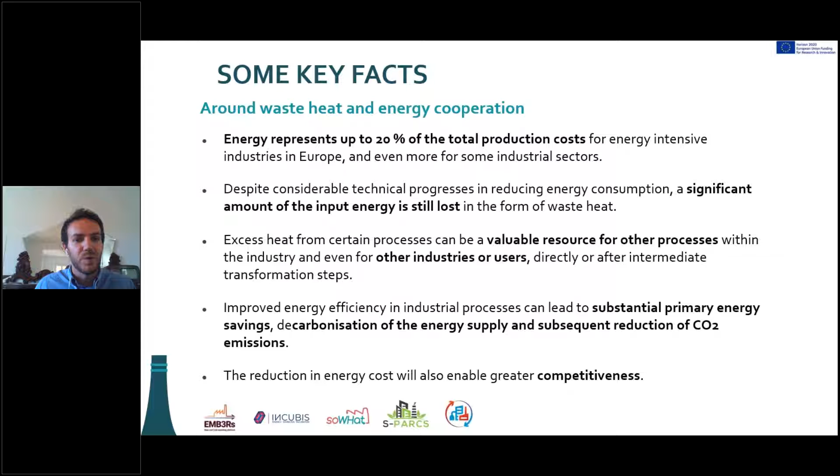And therefore cut our CO2 emissions. And in this sense, not less important, what we can also obtain is to increase our competitiveness in this moment, which is quite difficult for the industry around the world.

That said, I hope you will find this webinar interesting. You will see that these projects, some already started a while ago, some just started, and we are working on collaborating. We hope that you will find everything interesting.

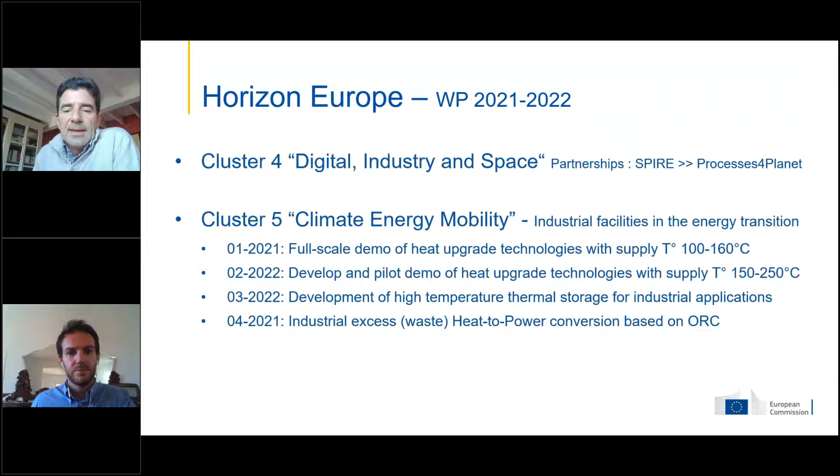Then the last topic is similar to the one we had on Horizon 2020, so heat to power conversion. But as the previous one most probably will rather go to funding supercritical CO2, this time it would rather be based on ORC technology, tackling rather a lower temperature range of waste heat.

All of this contributes to one of the biggest chunks of the energy strategy, which is energy system integration, where we have six priorities. The first one is to go for a more circular energy system, with energy efficiency first principle. That's really where waste heat recovery comes into play.

Circular in that the heat can be recovered within the plant itself, that's always the easiest, but also in industrial clusters to nearby plants or even to local communities for heating buildings in the communities. The second priority is accelerating electrification of energy demand, meaning the heat will be produced not only in the building sector, but also in industry. Again, an impact for you.

Promoting renewable and low carbon fuels, including hydrogen, will reshape industry, energy and feedstocks. And fourth point, making energy markets fit for that. This certainly resonates for you if you address business models, it really fits into the energy markets.

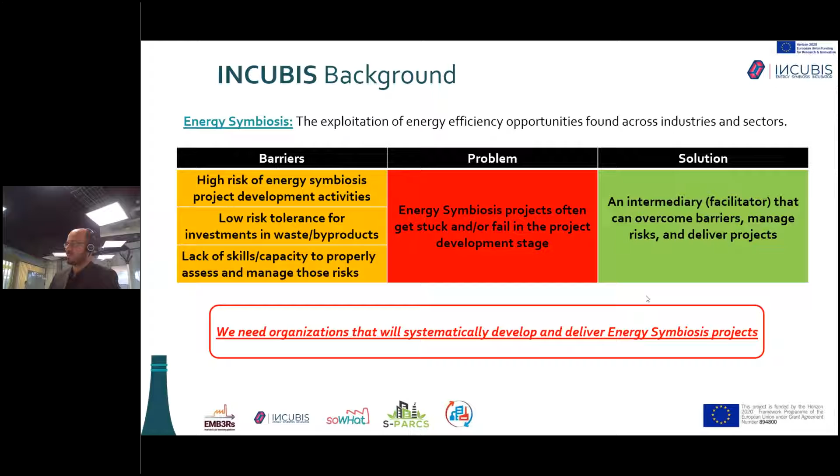The solution is known and it is quite successful. The solution is the existence of an intermediary organization, often called a facilitator, who has the structure and the capacity to overcome these problems and deliver the projects. So the goal or the vision of Incubis is that we have to somehow increase the number of organizations that can actually systematically develop and deliver energy symbiosis projects. And therefore, we follow the incubator model, whereby we're not incubating any type of business, but specifically we are aiming at organizations that can be facilitators.

We are currently developing, and we are going to launch as of May 2021, the Energy Symbiosis Incubator that will provide support to these organizations that can act as energy symbiosis facilitators, with the aim to improve their capacity to deliver energy symbiosis projects. In doing so, we will also set up a virtual platform that will support the delivery of all the tools, services, and methods of the incubator, and will also support the organizations we are helping to deliver energy symbiosis.

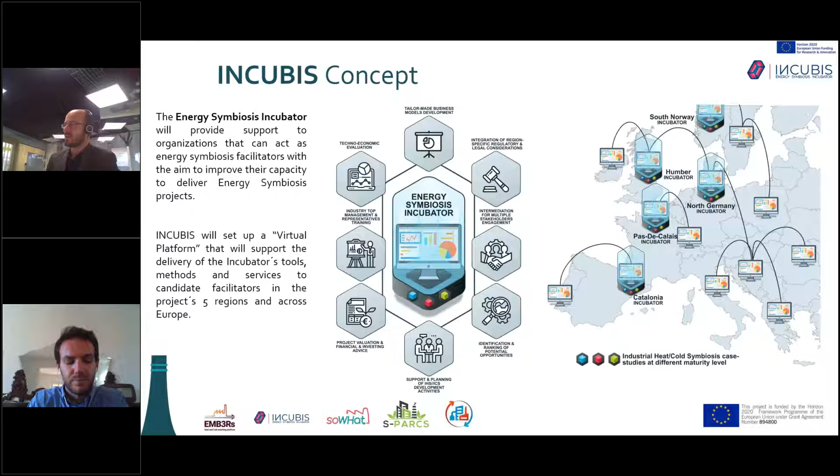You can see here our model. I will not go in detail through all the services, but our model is to launch such incubators in 5 regions across Europe. The regions are Barcelona in Spain, Dunkirk in France, the Hull region in the Humber region of the UK, the Agder region in South Norway, and Brunsbüttel in Germany, in Brunsbüttel city

and industrial park. And the type of services and methods we are delivering here involve techno-economic assessment, business development, implementation frameworks for symbiosis, facilitation methodologies for delivering symbiosis, and of course working across training, policies and impact monitoring for these projects. And you can see in this scheme which partners are responsible for what type of service and tool.

The approach we are taking here is that we are working on case studies that existed before the beginning of the project. We are learning from them, and as of years 2 and 3, we intend to multiply these energy symbiosis projects in the 5 areas of the project, and hopefully by the end of the project work also outside of these areas. For each energy symbiosis project, we are providing support across the life cycle of energy symbiosis, which is the typical life cycle of an energy project involving a preliminary assessment, opportunity identification, feasibility study, and finally delivery and implementation.

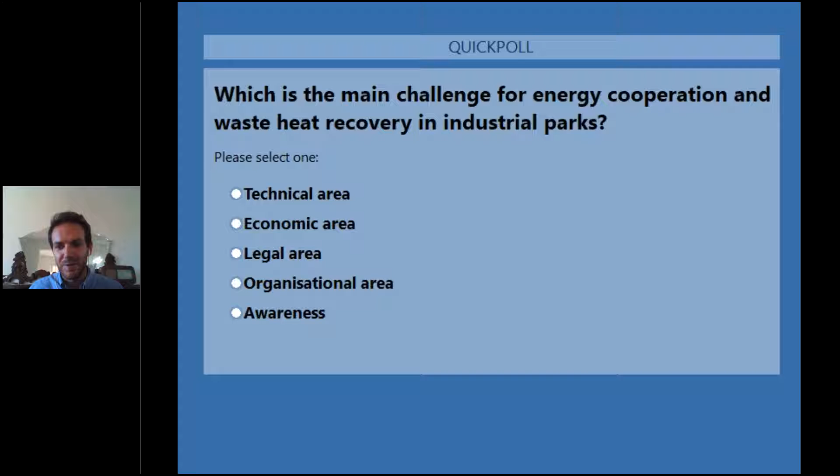Okay, I can anticipate that the main challenges are here. You can see them in the economic and organization areas, not neglecting technical and awareness. Legal is a little bit less stressed.

So Nick, you should be able to share your screen now, and please keep the time. We are a little bit late, nothing crucial. We can see your screen. We cannot hear you, Nick. Can you hear me now? Yes, but we don't see the screen or your camera. Now we see the screen. Can you see one slide full screen? No, we see it in presenter mode. Better now? It's in presenter mode, and we cannot see your webcam. Okay, you should now see my webcam, and now it's full screen. Perfect. Brilliant, sorry about that. I live in Scotland and I'm in the middle of a storm, which seems to be interfering with my connection. I will try and move closer to the router, but please let me know if there are connection issues.

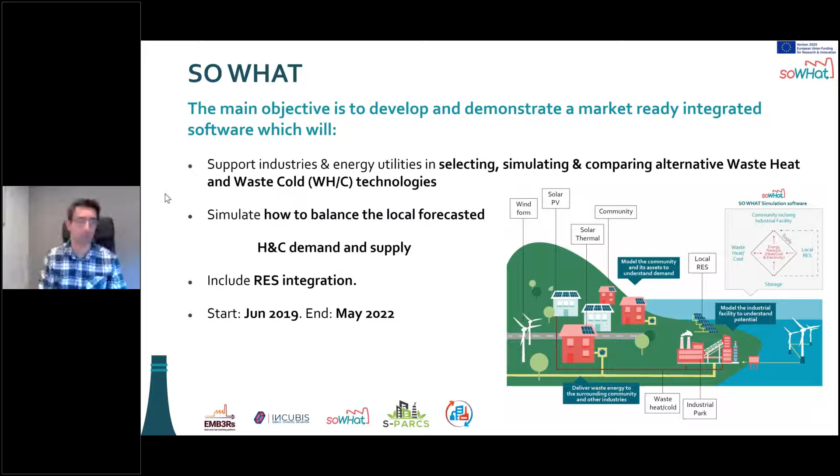Thank you. So the timeline for the project, as I said, is over the next couple of years, and we're currently halfway through the project, and we have done industrial site assessments already. We actually have 11 demo sites that we're going to be using and testing the software on in this project. We've developed a technology database that contains all of the technical and economic parameters concerning different technologies in waste heat and cooling. We've also specified what the software needs to do, both from an end user perspective and from an IT perspective. We're halfway through some business model analysis, and trying to understand how we can integrate energy performance contracting and distributed ledger technologies

into the waste heat and cooling area. Over the next year, we're going to be developing the software and validating it in all of the different industry and demo cases. The final part of the project is to do an analysis of the impact and the lessons learned, and replicate a lot of the things we're doing with the demo sites, hopefully across more industries and communities. I'll just talk briefly through some of the functions that the tool will do. There are three broad areas.

First of all, you've got to baseline the waste heat and cooling as you have it now in your industry or community to try and understand what the potential is for doing this. So the software will have a kind of integrated but minimal data collection associated to it. We'll be able to show lots of different energy flows and what the waste heat and cooling baseline is from an industry perspective. We'll be able to show from a community's perspective what your heat and power supply and demand are, and that is wrapped nicely in a 3D view.

Then we also have on the simulation side of things a lot of different technologies, which I'll move on to in a second, to do with waste heat and cooling, and how you can integrate that with renewable energy technology and balancing the forecasted heat and cooling demand and supply.

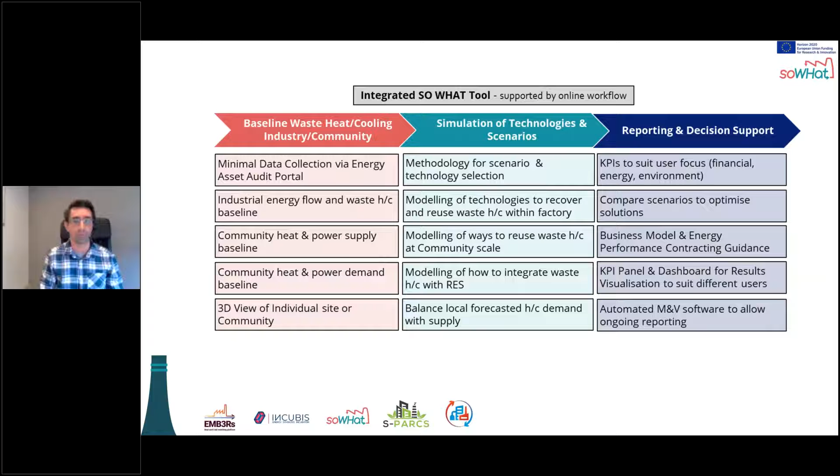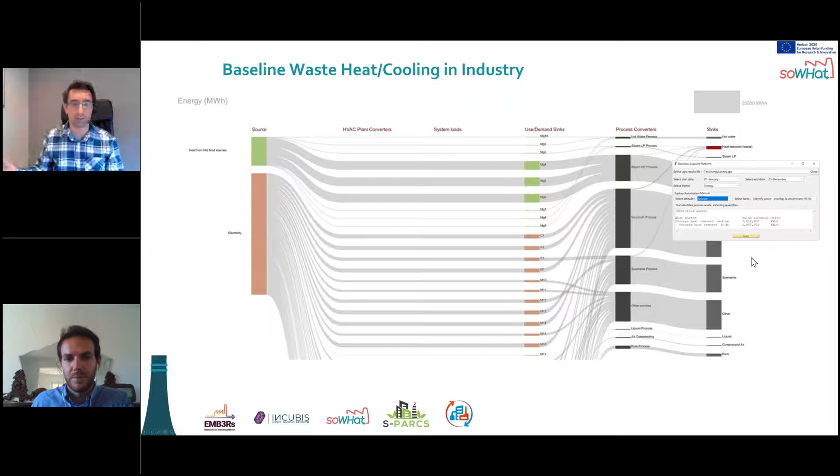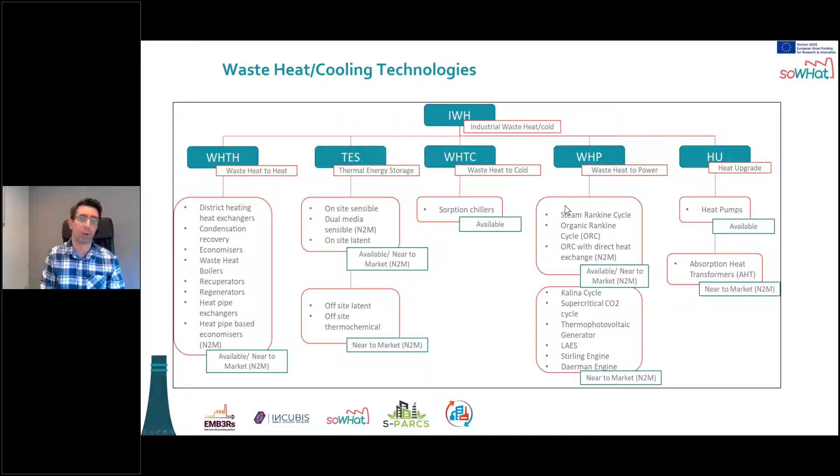And then finally, these. Thank you. I'm near the end. I've got one more slide.

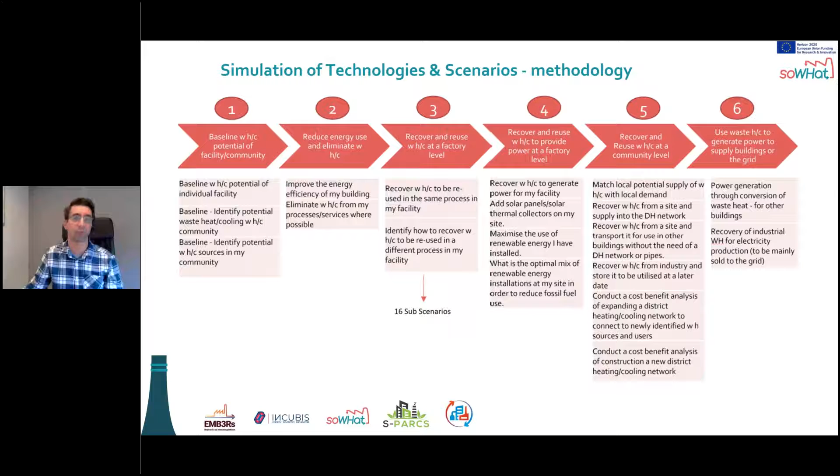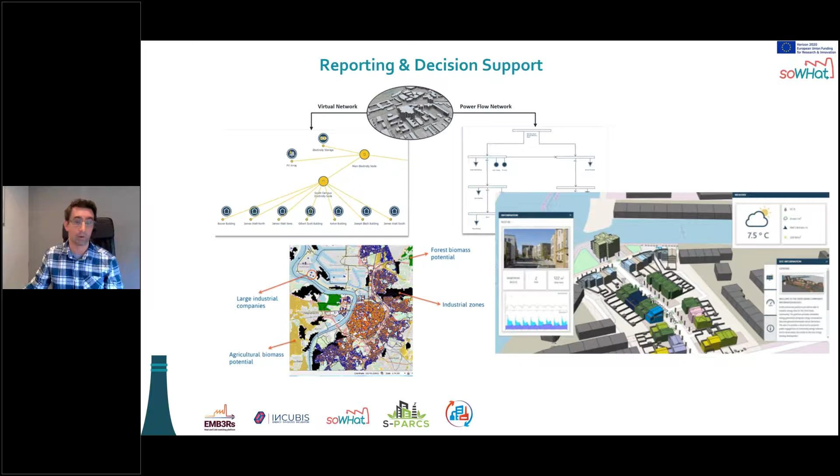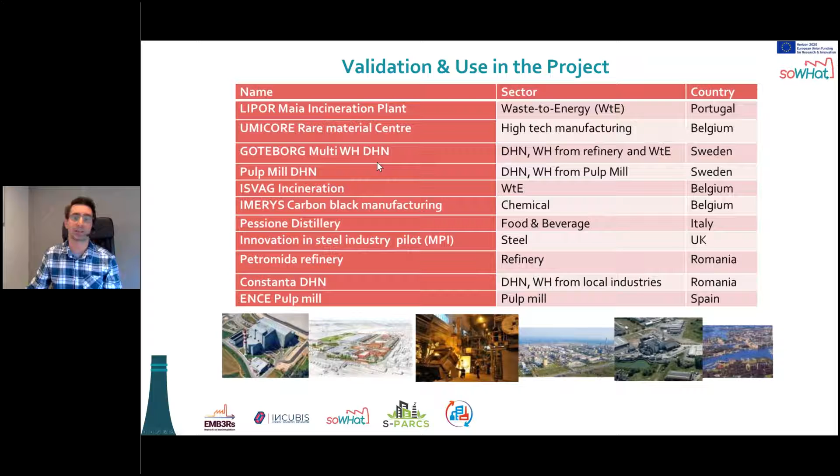And that is the end.

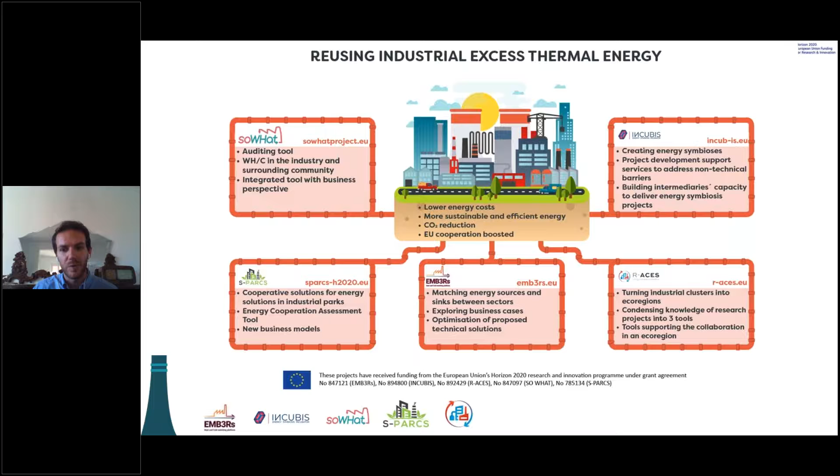In this slide, there are some key facts about the project, and we will share the slides. Now I'd like to ask the various presenters to open their cameras. We have some questions we will try to answer.